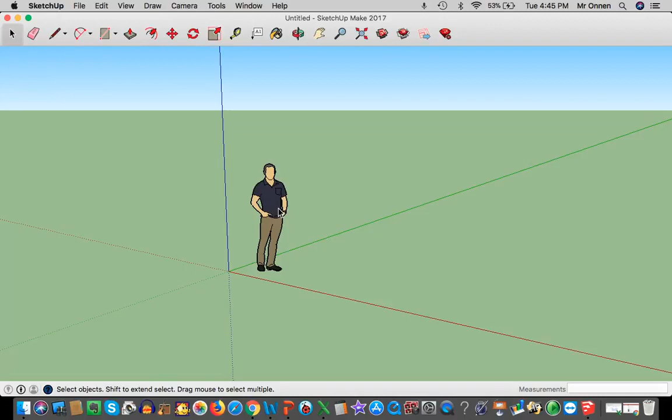All right, ladies and gentlemen, you should feel very important because this is the fourth time I've recorded this video. The first time went for about 20 minutes, got the project almost done, and found out my screen recording tool no longer works with the updated Mac version.

So that's sweet. Start off, go to File, Import, and we need to be importing this file. If it doesn't show up or won't let you click on it, it's because you probably have Sketchup chosen from the format by default, not your fault. Click on PDF and bring it in.

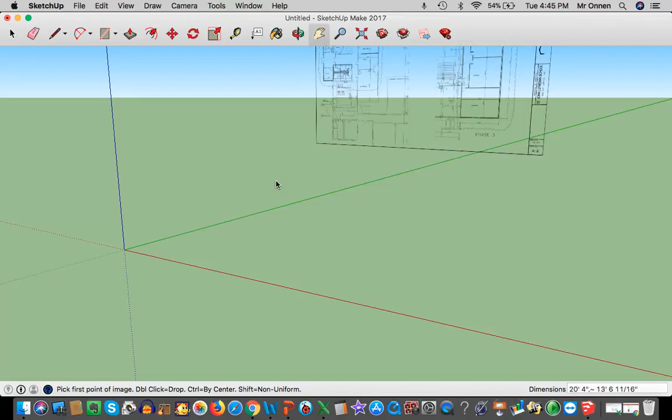If you have a hard time getting to that point because you downloaded the wrong file, perhaps a website file, you need to click on the three vertical dots in Google Classroom, open it in a new window, and then you can download.

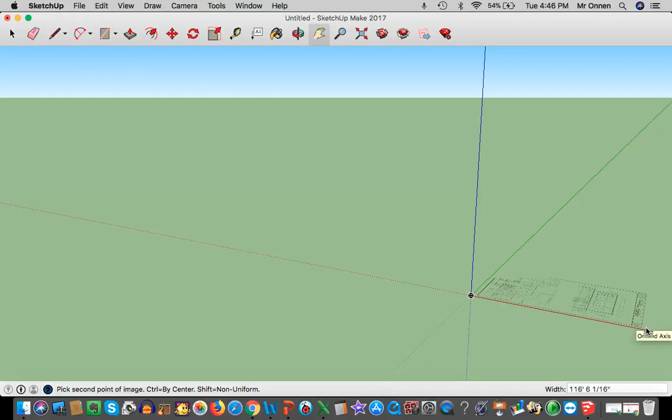Now I'm going to click and make this grow, using two fingers to grow out and make this bigger, as big as I can get this blasted thing. It says it's 116 feet so far.

That's fantastic. The reason I want it to be big is so I can more accurately measure, and that'll make all the measurements closer to scale. So I'm going to zoom in with two fingers, and we're going to use that a lot.

I'm going to use the tape measure and go from one wall to the next wall. That is supposed to be 40 feet, 8 inches. I'm going to enter. You want to resize, of course, that was the point.

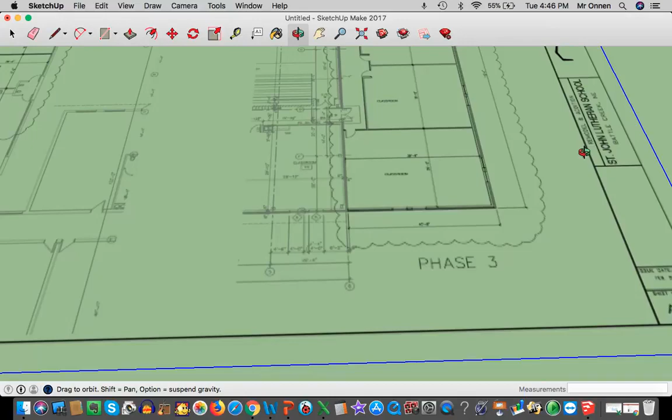Now it's important that we remeasure this because we're going to use that in just a minute. If I may have clicked a little bit too far, since these lines are kind of blurred, it's possible that it's not exact, and we want it to be as precise as possible.

So I'm going to measure this up. Hopefully it's about 40 feet, 8 inches. Looks like we're real close there. So that's great. Next thing I'm going to do is get this in place.

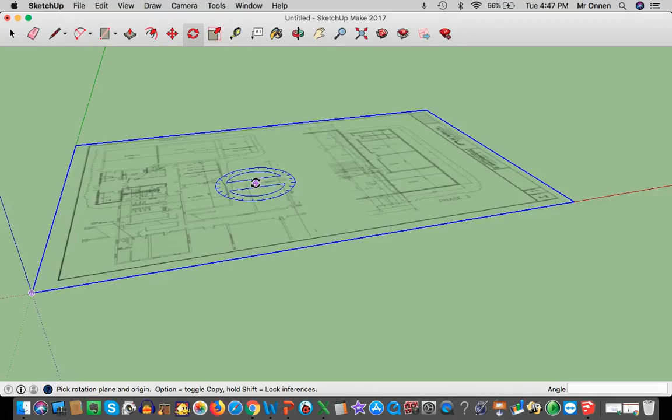Usually right at the axes where they meet at the point of origin is where we want our picture to begin. This would be the front of the school, but you're only doing the remodel project, so we want the remodel right here in the front. I'm going to grab this, click on it, and flip it 90 degrees, just like so.

Click again. I'm going to use this push tool to push it into place, so when I have the three-dimensional model, it's right here in the middle of what I'm looking at. I'm going to move the entire project there. This looks like it's all lined up pretty well.

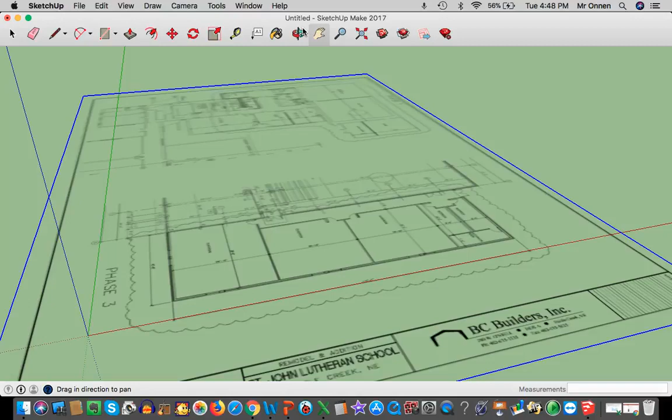So I'm going to flip this, so I'm looking down for the most part on my project. And now I'm going to draw in my rectangle.

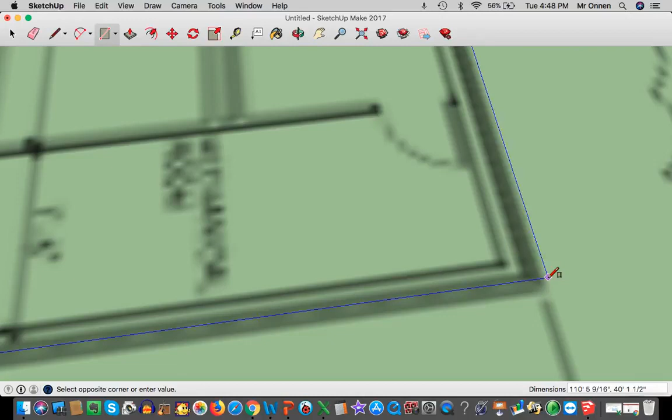I'm going to use two fingers and zoom in by moving up with the mouse. Click with the mouse and zoom out by pulling down. Move the mouse to the opposite corner, and now I'm going to zoom in by moving my fingers back up. That's a really important skill for you to have.

So I wanted this to be 40 feet, 8 inches by 112 feet, 1 inch. I'm going to hit enter, and hopefully it lines up pretty well with my diagram underneath.

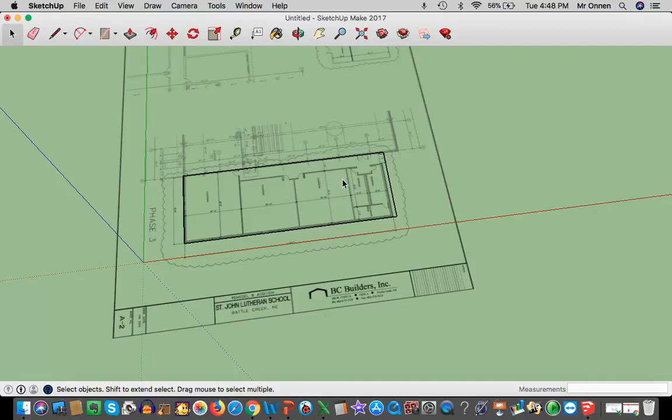I'm going to just double check quick, delete that. Looks like it doesn't line up quite perfectly. I think it's close enough for my demonstration at least, but what probably happened was this isn't exactly accurate, the model underneath.

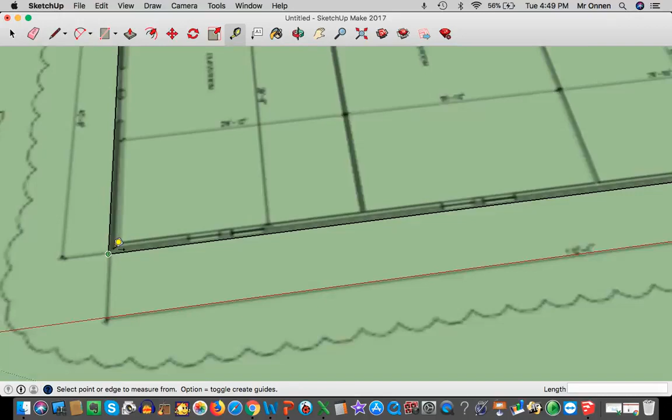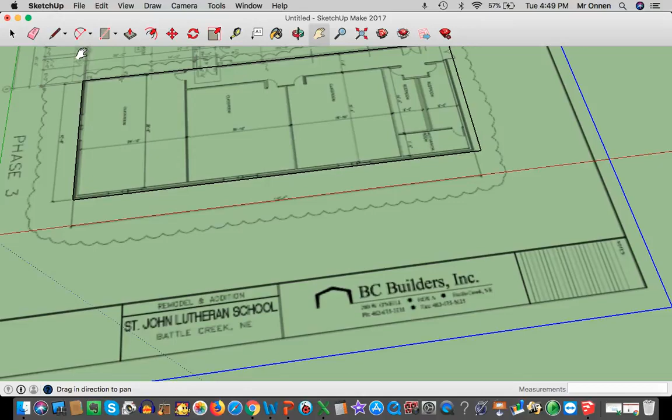So for now, it's going to work. The next thing I'm going to do is use this tape measure, and you're going to use this tape measure a ton. I'm going to find a corner, click on it, go up, and put in 6 inches. This tape measure tool is your most important tool, I believe.

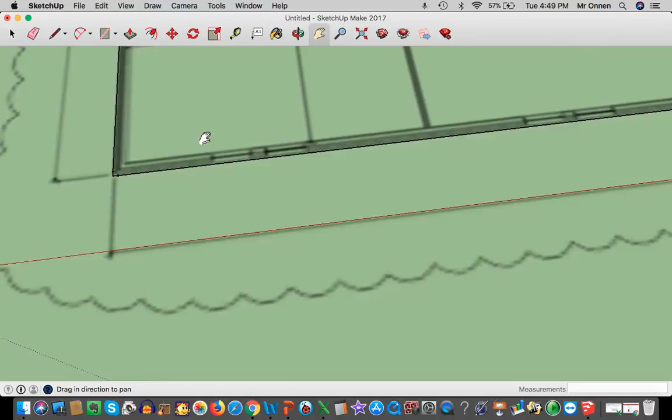Go over 6 inches again, and hit enter. The reason we're doing 6 inches is the standard wall is roughly about 6 inches, depends somewhat. But that's going to give me a line now where I'm going to zoom back in on that 6 inch spot.

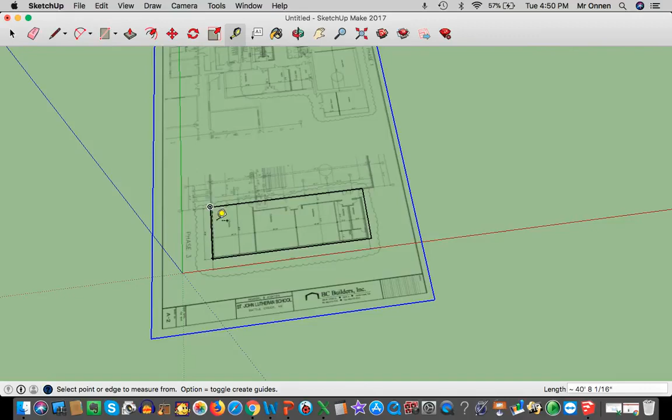Click on my tape measure, and it'll snap right to the 6 inch. I'm going to zoom out by pulling my fingers back down, move the mouse up to the top, and zoom back in and make sure that I am lined up. And now I have a guide for where to put my rectangle.

Zoom back in using 2 fingers, click on the guide mark at 6 inches, zoom out, and I'm gonna have to snag this and pull it over. That's okay, because when I go back to the tape measure, it's still gonna have my spot. Zoom in, and when it turns red, it means I am lined up. So I have my guide.

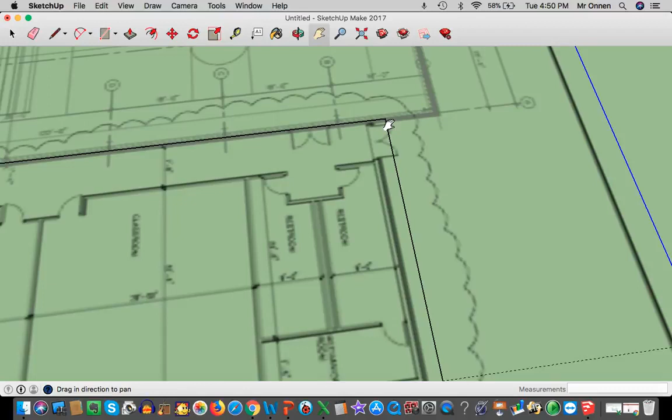Now I'm gonna go to the opposite corner. You should only have to do it on opposite corners, not all 4. And measure my 6 inches. And enter. And from the corner, measure my 6 inches.

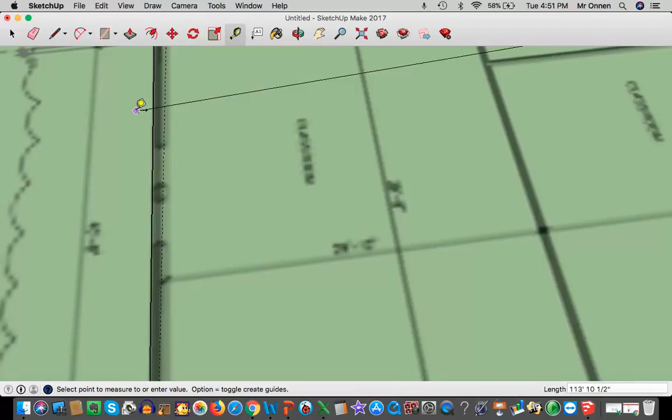And then again, click on my guide point, zoom out, go to the opposite corner, get my mouse where it needs to be, and it'll zoom in up here. There we go. And when it locks into red, that means you're lined up well. And we're almost done with the outline of this.

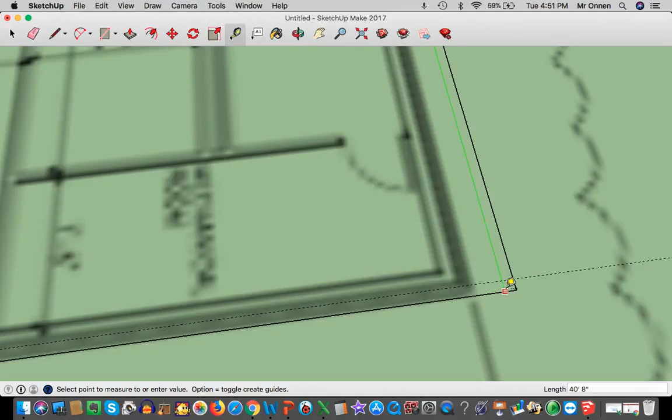After you outline the first box, after you've figured out how to do that, you've done that well, you're pretty well on your way. There are a few little tips along the way that'll help, but you're pretty well on your way. Okay, in this direction, it's the green line that tells you that you're square.

So I'm going to grab the square tool, click in the corner, zoom out, and slide this over. Grab my square tool again to finish my square, zoom in, and...

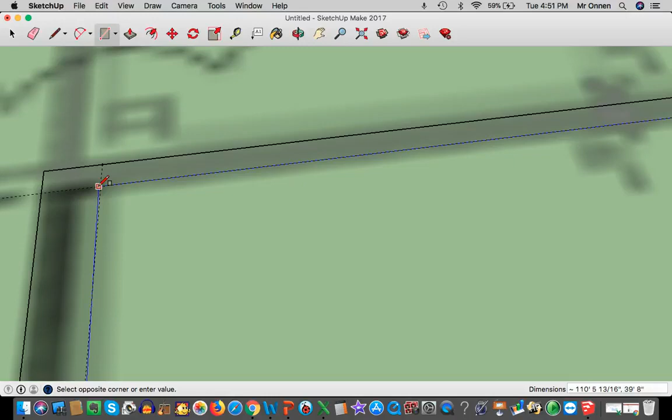That doesn't line up quite right. What's going on here? I have 6 inches there. All right, I'm going to measure this because that looks a lot wider than it looks tall. So hopefully this is 6 inches and I'm just at a funny angle. I'm not even close.

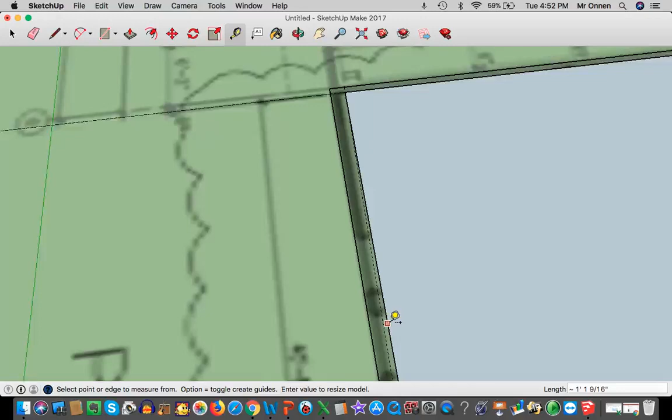So I did something very wrong. Oh, I picked the wrong line. That's what I did. All right, so we're going to undo the rectangle. Command Z is magic. And I did not go close to level.

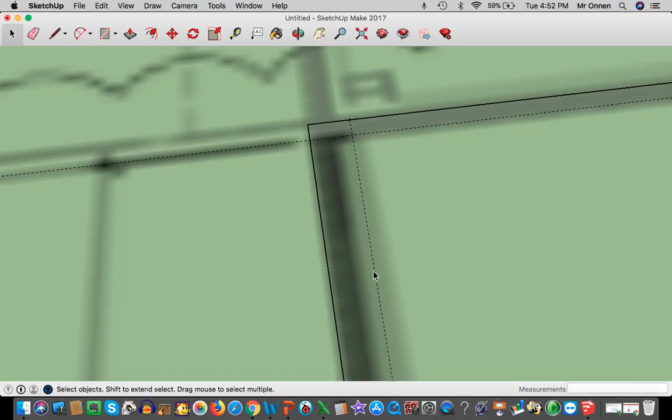So I'm going to give you a good example: if you mess up, you can just click on your line. Maybe. Get out of here, Safari. You can just click on your line. Click on your line. Must be on a different plane.

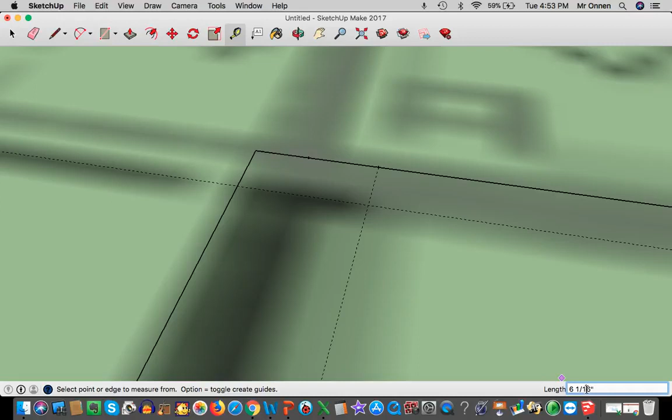Usually you can just click on the lines to delete them. I'm not sure why it's not letting me, but that's all right. We can work around it. What I'm going to do is measure in 6 inches. So I must not have been quite square when I made that line.

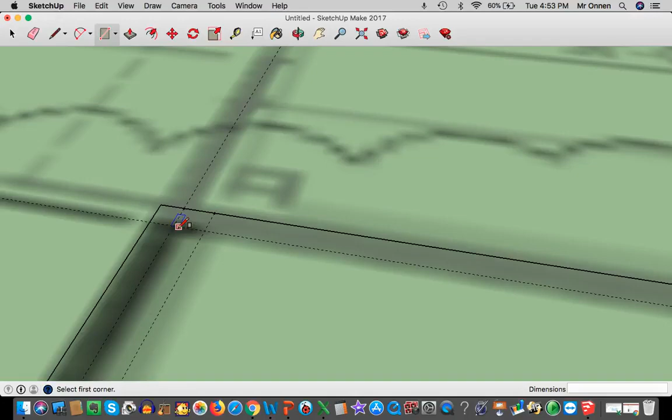Better to know now than later when the project's half done. So I'm going to click on that and go to the other corner. That is at 6 inches right there. Now we are square. So I'm going to go back up, and I'm going to intentionally start my square in that corner. That way I don't accidentally go to the wrong one. So we'll zoom out, grab my tool, zoom in to the corner, grab the tool back for the rectangle.

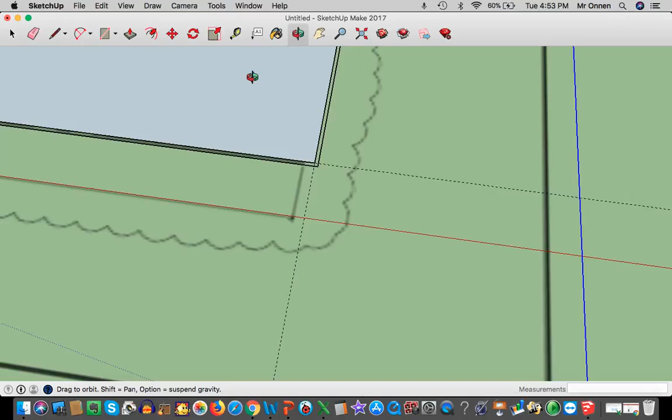And finish my rectangle finally. All right, I'm going to change my angle. And since I already deleted the inside of that original rectangle, I do need to put in a new one that just goes over top of all of it. Right there. And that way I have my outside walls done.

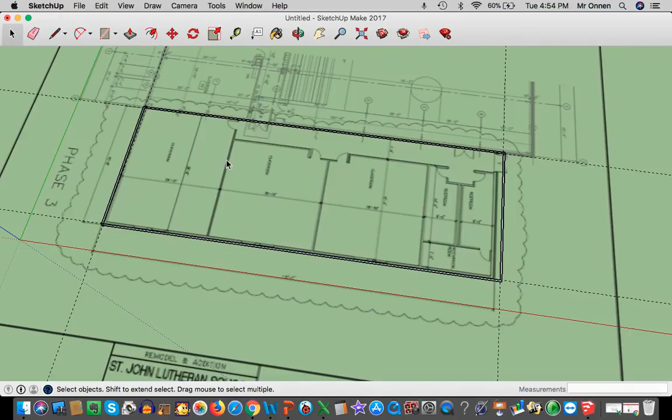Hooray! So I'm going to click on the inside and delete it, and now I can see the rest of my diagram. I'm going to work on the next one now. For the next one, my lines are a little bit off, but that's all right. It doesn't have to be perfect, just close. I'm going to measure 6 inches.

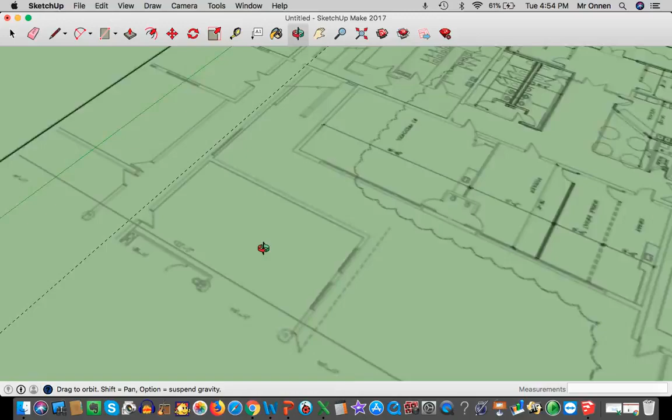It would be a good idea to check this. It looks like it's 29 by 5, I believe it says. Good idea to check this and make it exact. We can make this 29 by 5 feet, and from there I'm going to measure over 6 inches.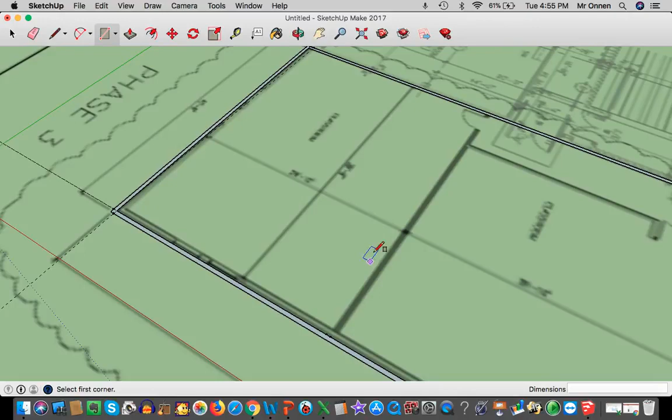That way I start the wall exactly where it's supposed to be. I'm going to use this second guide point in a minute, but for now all I'm going to need is that one. We could check the measurement for how far this is and draw it in exactly, but I'm just going to trace the lines for now.

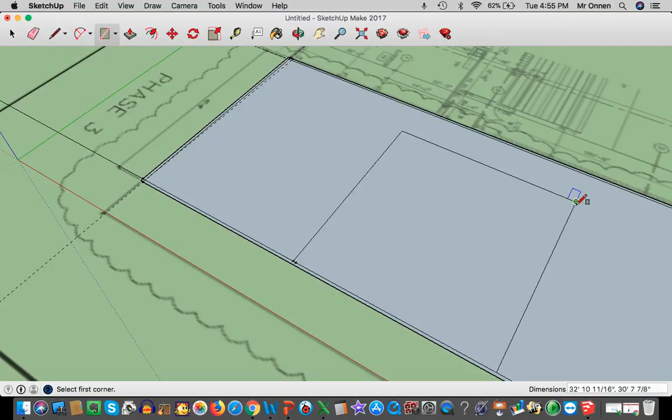And plop her in. And I have my guide point here. I should be able to draw it straight across and connect. And then on the other side, again, there should only be a few other lines I have to measure.

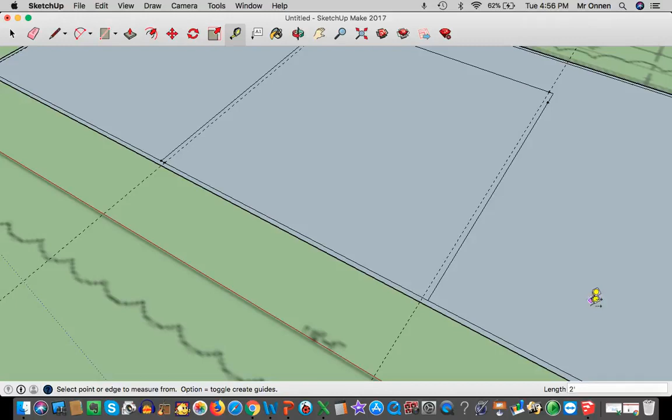From here to here, I want it 6 inches, because that's what most walls are. Drop that line in. There we go. And then from the corner down the side, I want it 6 inches. And click on that. And we're going to navigate over here, grab the measuring tool again, and finish over there.

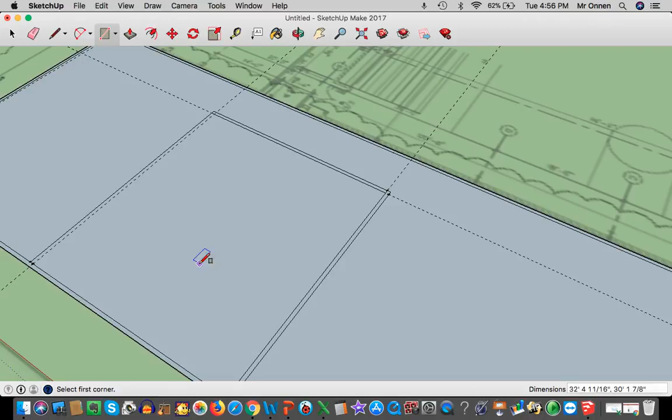So now I have my starting rectangle, and I have the guide for where to put the next one. Now, it is important that you know this, that we're not going to put 2 walls here. So I'm going to use this existing wall and make an inside wall. What I mean by that is I already have a wall right here. I'm not going to make 2 of them.

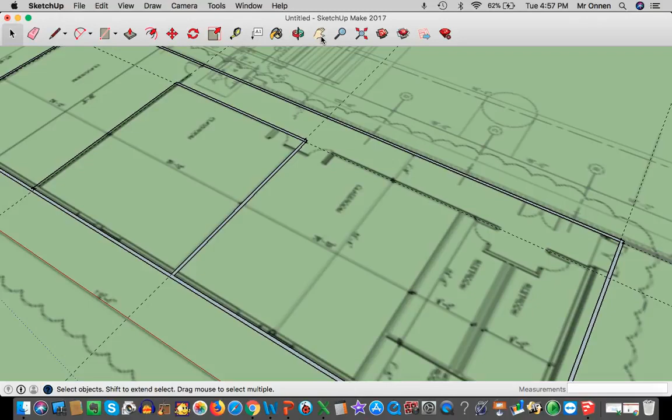If I wanted to, I could use a push-pull tool now to make it 3-dimensional to give my walls height. It doesn't make a whole lot of difference, but it might be easier to outline the entire thing first and then push-pull it at once. I'll show you what I mean right now. I'm not going to do the entire thing, but I think you probably have the idea on how to get started at least now.

Oh no, did I delete the wrong thing? I tell you what, I'm striking out today. Okay, with this wall, I missed the intersection. I hit it in the wrong spot. Zoom in, see, it snapped the wrong one. I want it on this one. And that was my fault, not the machine's fault. The machine does what I tell it to do.

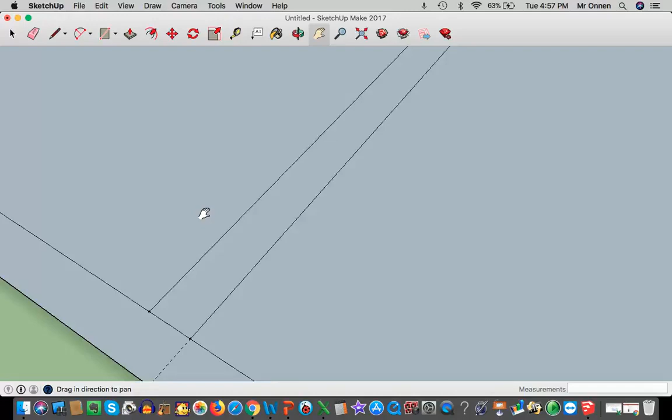Okay, that looks better. So now I can delete this, but this is what I mean by you can push-pull it all together. I delete this little in-between line because I want the walls all to be connected, no lines between. And I'm going to click on the meat in between there and push-pull this baby up.

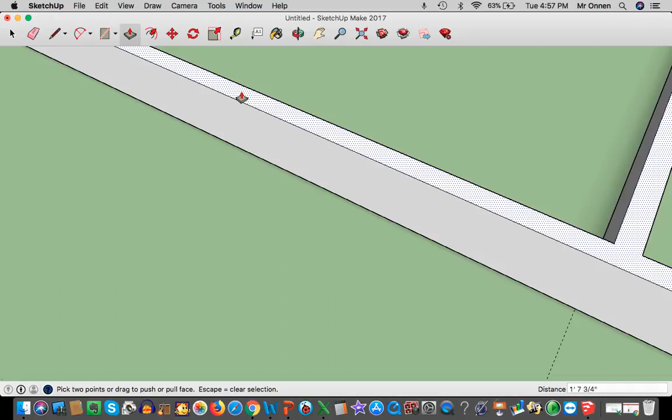I don't know exactly how tall the walls are going to be. Since it's next to the gym, I want them to be fairly tall. We're going to make it 12 foot tall. And voila, I have the start of my diagram. And this is my example. I have one that's already a little ways further than this, but it didn't get on the record.

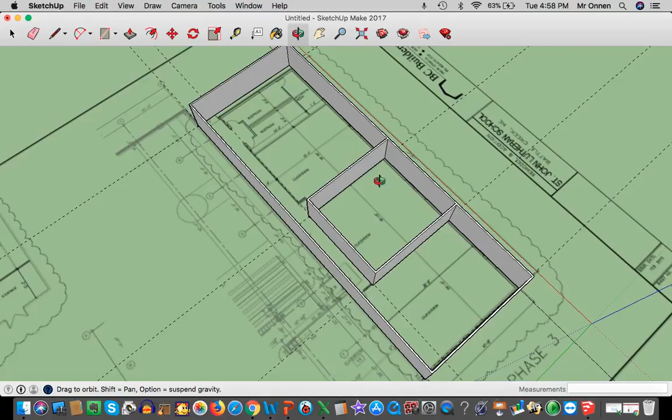So you can kind of see how you start off making this. Again, I would pay close attention to the numbers for how big things are, just because you want this to scale. Part of your grade is going to be, did you make it to scale? Are the measurements accurate?

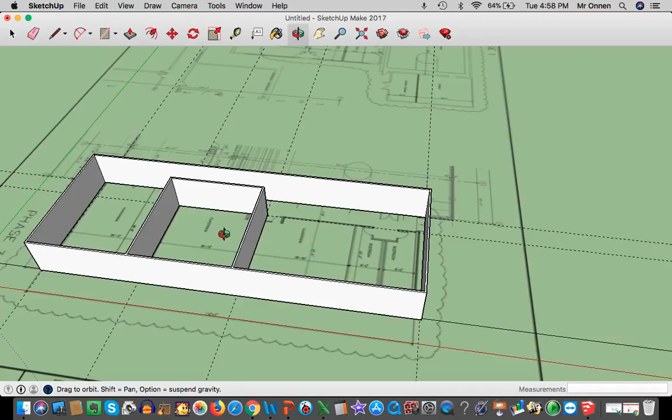And if you can't read it on this, open the PDF individually. That PDF file, you should be able to zoom all the way in and read absolutely every number on that to get what you need. So hopefully that gets you started. The rest of the videos should be able to get you going with the rest of the way. Good luck.